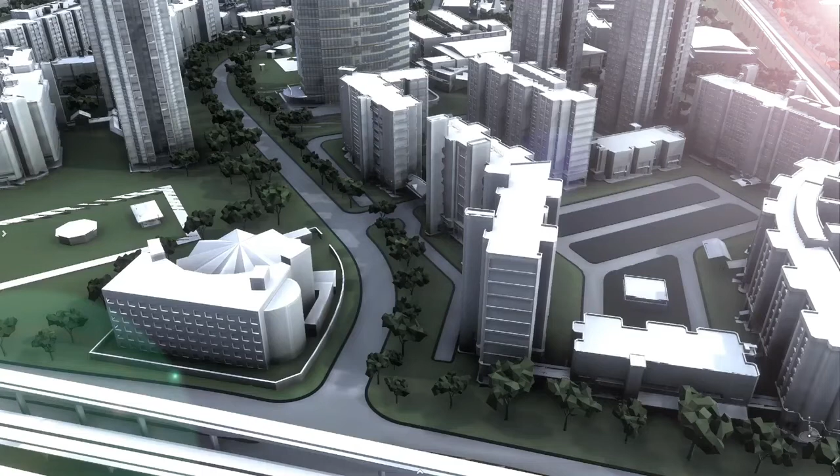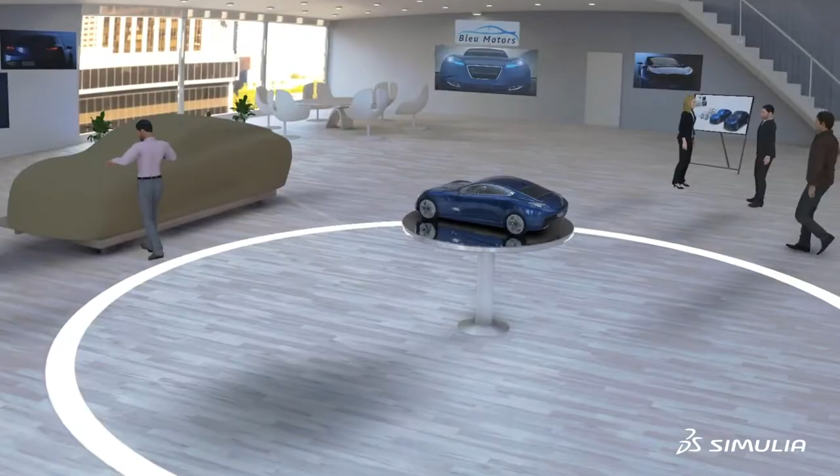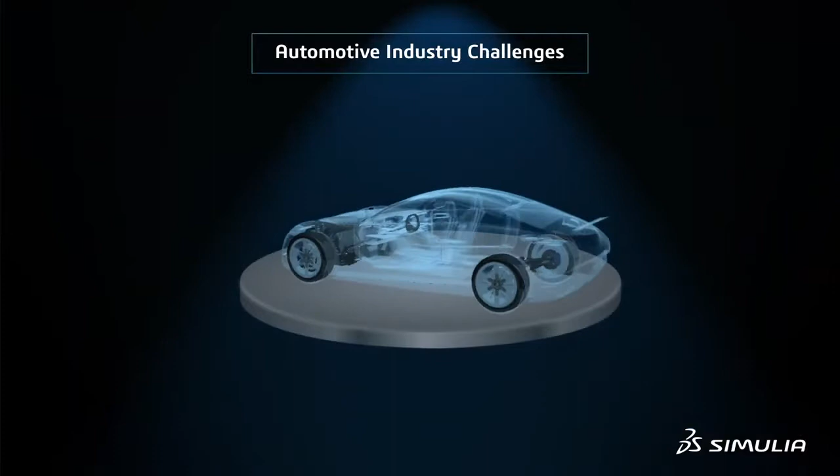Bleu Motors is a vibrant startup who are planning to showcase their first car in the upcoming auto show. In order to stand out in the highly competitive automotive market, companies need to minimize physical tests and prototypes, manage vehicle configurations, and validate controller interactions.

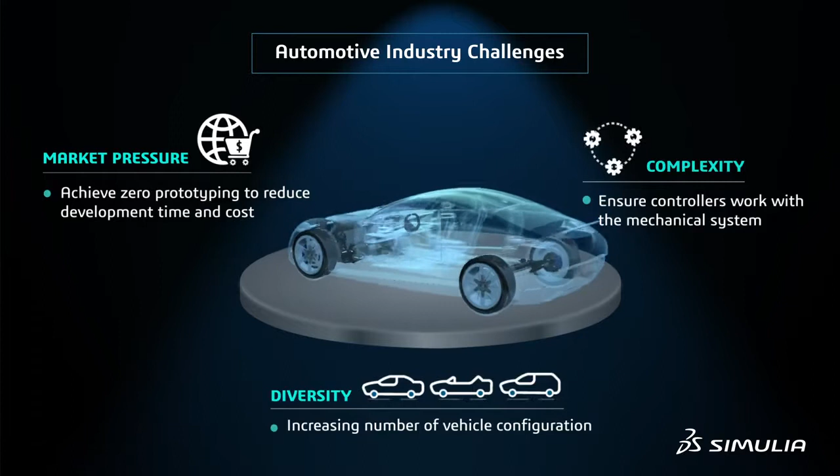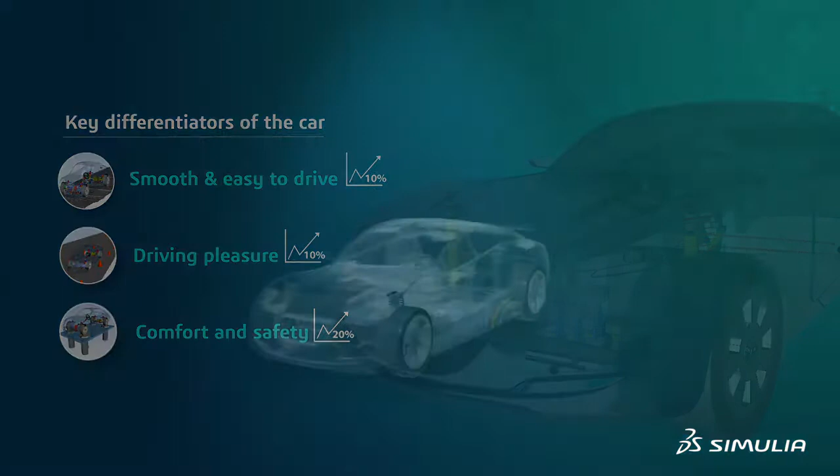Based on the market research, the strategy team decided to design a car that would differentiate in terms of ride, handling, drivability, NVH, and durability. To meet these objectives, an engineering team with Joe and Emily was formed, who are vehicle dynamics engineers. Emily also created a dedicated community for this project to collect and share the know-how.

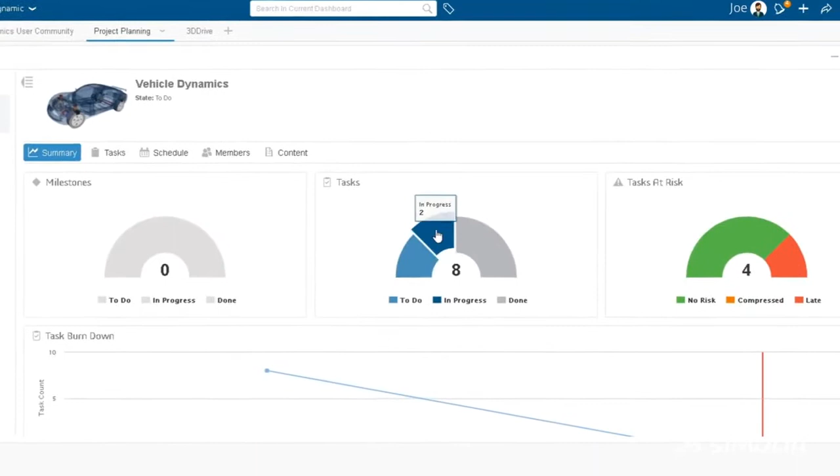Using the project planning app, Emily created a project scope. This helped her to plan, execute, and monitor the project efficiently. Emily created a database, which is a library of all the systems in a car, and stored it on the 3DDrive. The team identified several workflows for improving the dynamics performance.

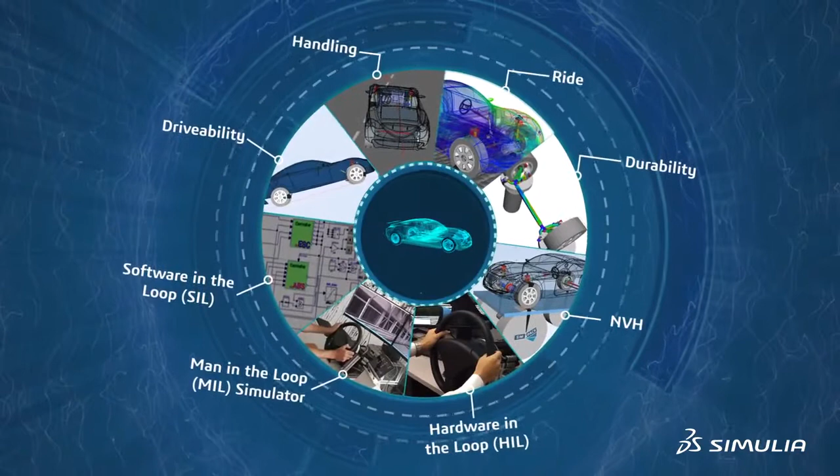Since there are multiple workflows, Joe chose the tire model as per the load case. For the ride and durability workflows, he created flexible bodies for BIW and rear subframe. For NVH performance, the detailed powertrain was chosen.

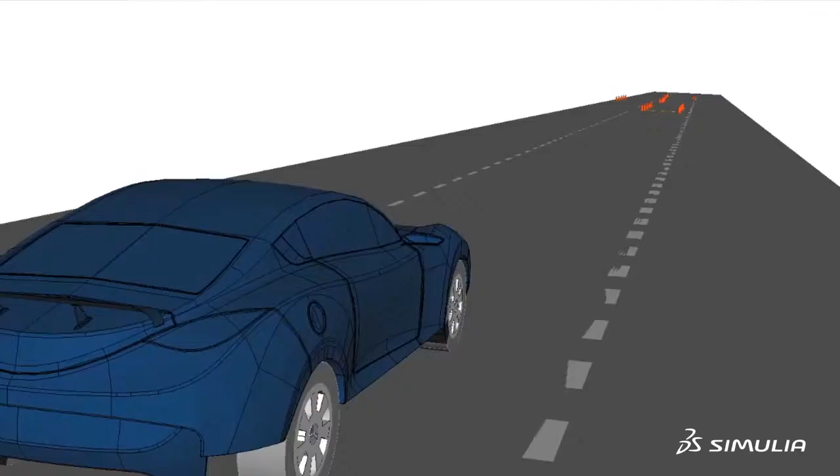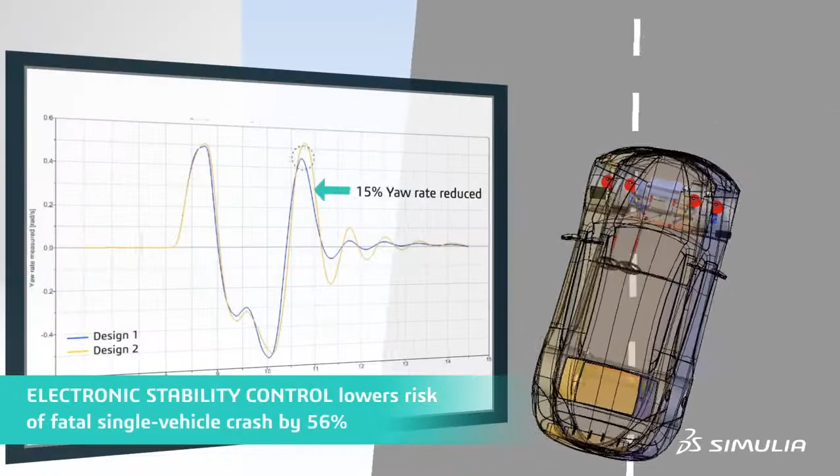We performed 4 handling load cases. To reduce the body roll, different tire models were tested. Hard tires reduced the body roll by 10%, making the car fun to drive. Electronic stability control can lower the risk of fatal single vehicle crash by 56%.

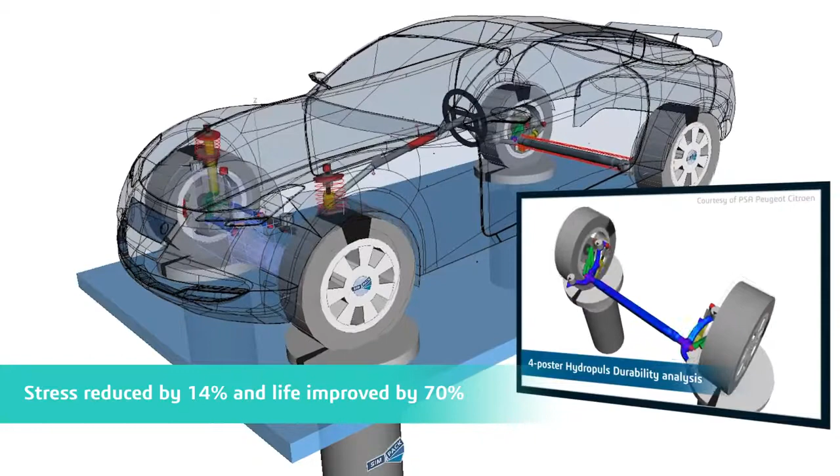We simulated the blue car with ESC and found that the car with ESC was much more stable while turning than the one without it. The 4-poster virtual test showed high stresses in the rear subframe. The modified design improved the life by 70%.

To eliminate gear rattle, we worked on the transmission system. We tuned the dual mass flywheel, which helped to minimize the engine torque irregularities. Improved half-shaft design reduced the vehicle jerks during gear change, giving better drivability.

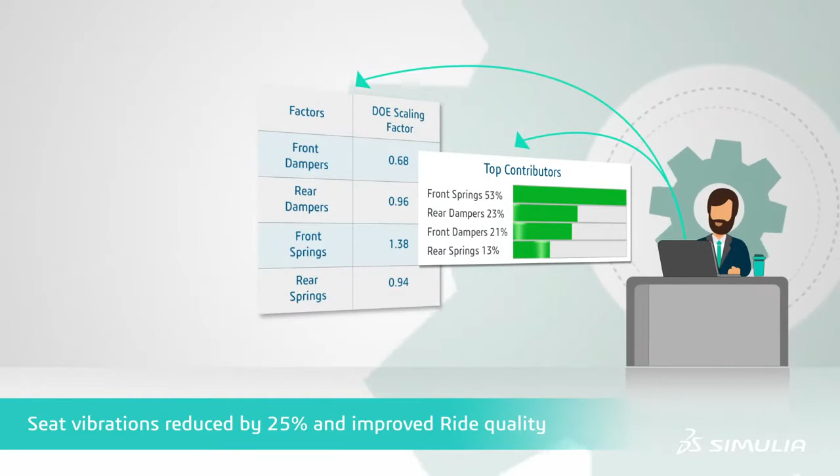The low-quality ride caused by seat vibrations can lead to fatigue. The solution was to work on tuning the suspension system. We did the design of experiment study and reduced the seat vibrations by 25%. The master model was finalized with all the modifications for the best possible dynamics.

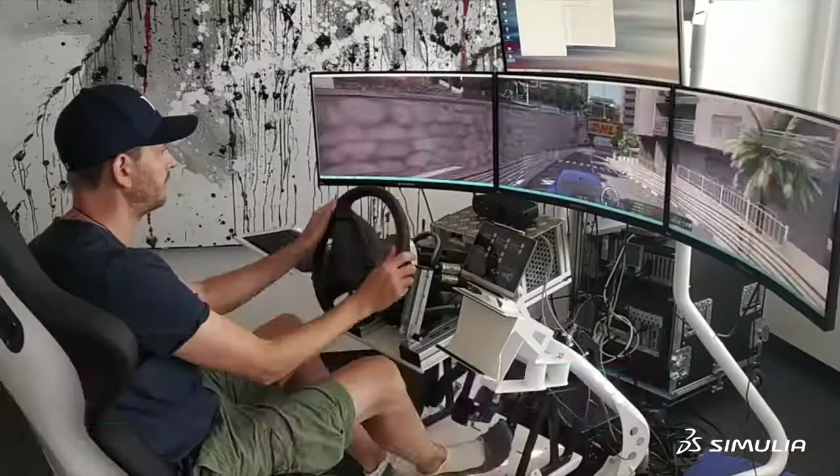To validate the model, we used a digital twin of Monaco circuit on the real-time simulator. Joe drove the blue car and was very happy with the performance. The team was very happy to see the progress. Emily shared the data with the vehicle program team. With the final design, the car was manufactured. And now, after all that hard work, it's time to go for a long drive.